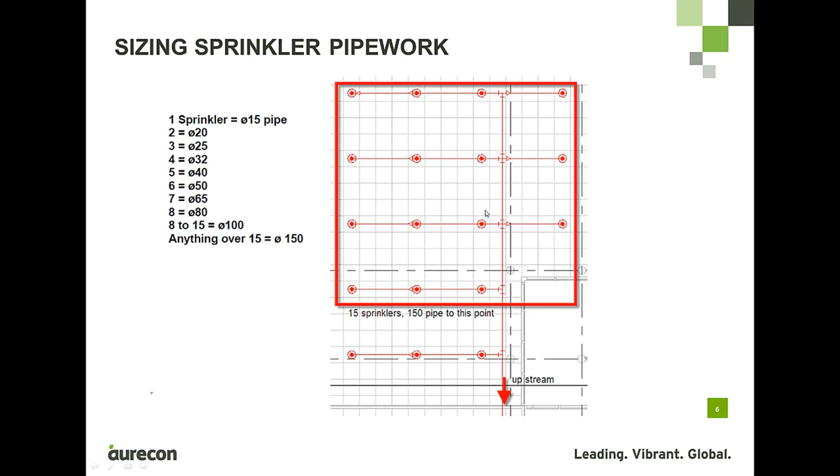If we then break it down, we've got 12 sprinkler heads here, so this pipe segment's going to need to be 100 diameter. We've then got 8 sprinkler heads here, so this segment of pipe is going to need to be 80 millimeters in diameter. And lastly, we've got 4 sprinkler heads on the end here, so this segment of piping is going to need to be 32 millimeters in diameter. And so on and so forth. You can work your way through, keep going downstream until you've sized all of the pipe work.

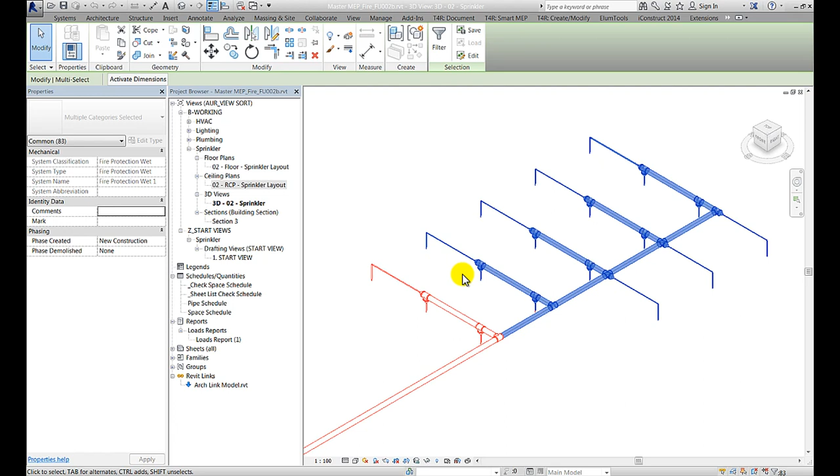So let's see now how we can apply this logic to our sprinkler pipe layout in the model. Let's expand the 3D view, and for this exercise we'll work in the 3D view exclusively. So going from our code, we know that if we're feeding anything more than 15 sprinkler heads, we need a 150 diameter pipe. If I select these sprinkler heads like so, I know that I have 4, 8, 12, 13, 14, 15 sprinkler heads here. So I'm going to need a 150 diameter pipe to this point, as I'm feeding more than 15 sprinkler heads from this point onwards, coming from the upstream pipe.

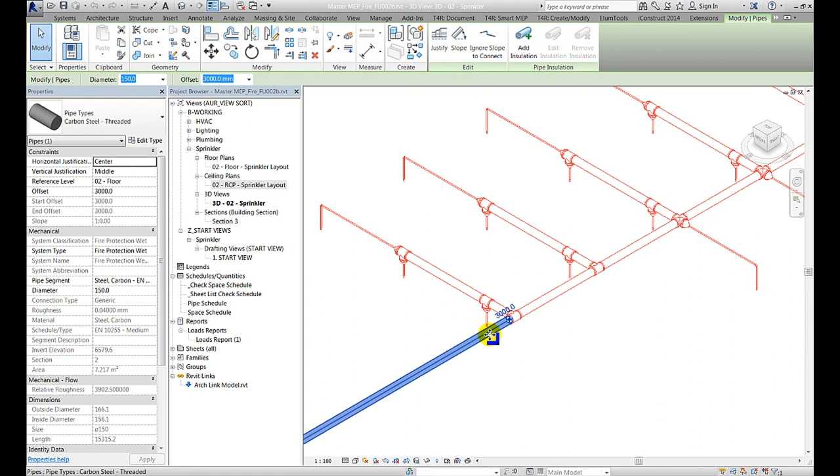So I can zoom in here. I can select my pipe work and the fittings to this point, and I can make sure that the diameter is in fact 150. If I move along downstream to this next segment of pipe, I can see that this segment is feeding 4, 8, 12 sprinkler heads in total. So I know that this segment of pipe, along with this fitting, needs to be 100 mm in diameter. So I can come up to the options bar here and change it to 100. And the pipe will change in diameter.

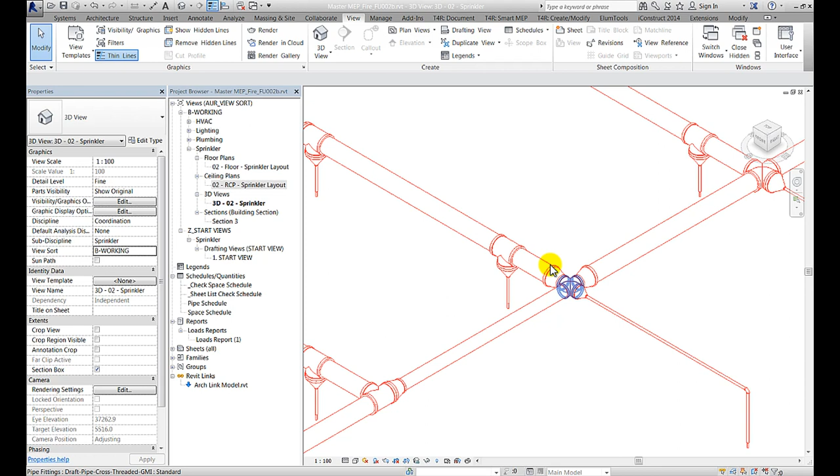And notice while I am manually changing the diameter of these pipes, Revit is automatically resizing and adjusting the layout so that everything stays connected. So it's somewhat automatic as I am manually changing these sizes. Let's keep moving downstream. If we come to the next segment of pipe here, we can see that it is feeding 8 sprinklers in total. So we know that this is going to have to be 80 diameter. I can select it along with the cross fitting, and from the options bar I can change it to 80. And the pipe will resize accordingly.

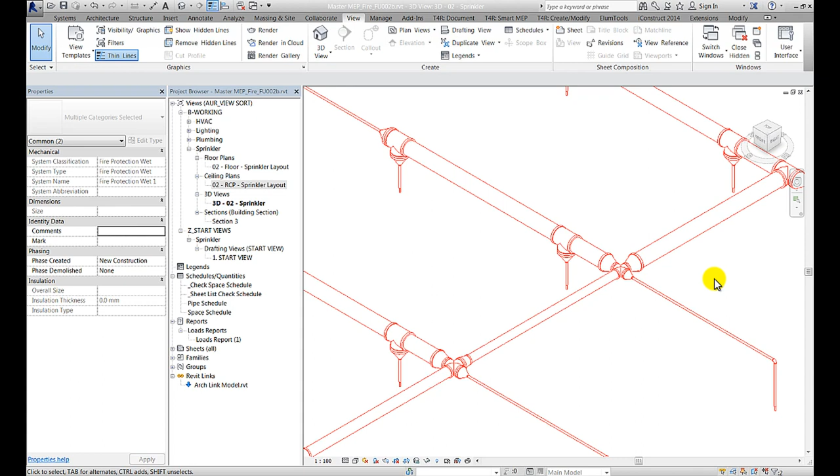And lastly, come up to the last section of main pipe run here. This segment is feeding 4 sprinkler heads, so this pipe is going to need to be 32. So I can select it once again and the fitting, and come up to my options bar and change that diameter to 32. We can now see that we have effectively resized the main pipe run going to the last T section here.

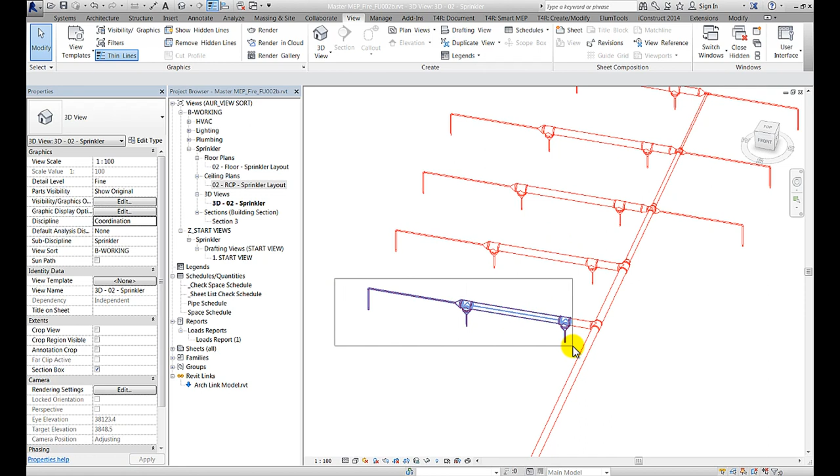Let's now have a look at the branches. If we have a look at the branches on the left here, we can see that each of these branches is feeding 3, then 2, then 1 sprinkler head. So going by our code, we know that these pipes are going to need to be 25, 20, and 15 respectively. So I can select my pipe and the T-fitting to this point on this branch, and I can come up to the options bar and change this to 25. You'll see the pipe diameter change accordingly and the transitions will be put in.

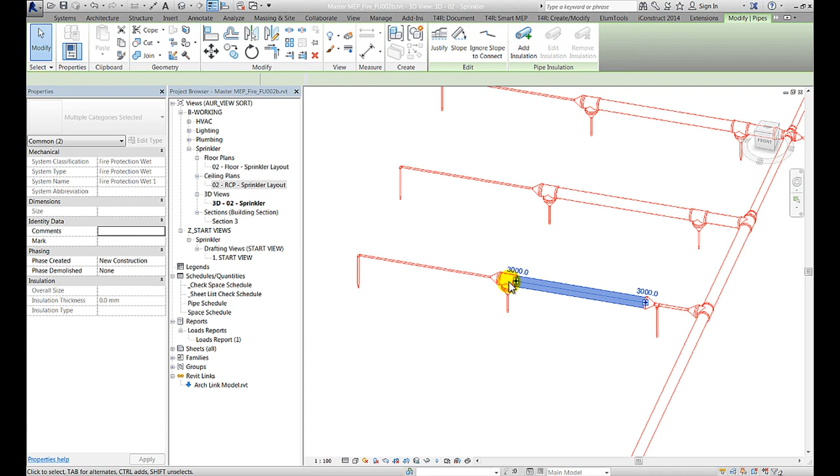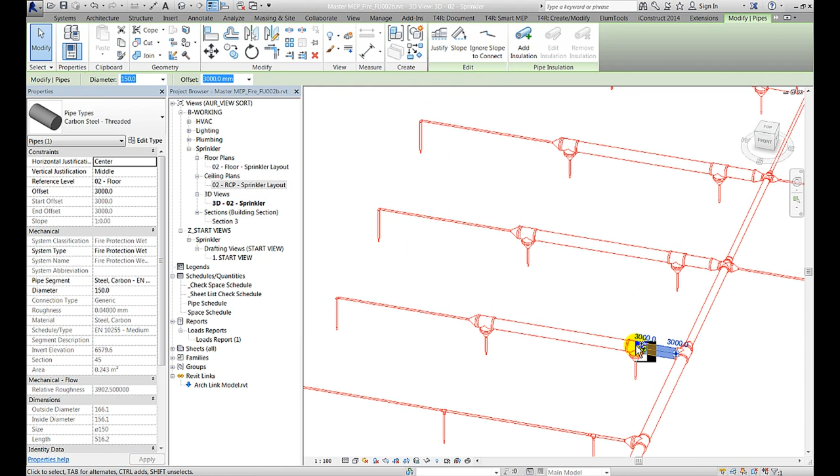Let's get this next piece and the T-fitting, and because this is feeding 2 sprinklers, we know this needs to be 20, so we'll come up to the options bar and change that to 20. And then we can see that this pipe here was already 15, so there's a transition piece already in there, and it's 15 right down to the sprinkler head, so that's fine. So let's work our way through and change all of these, and I can do them all at the same time for the same sizes. I can hold my control key down and select all the pieces in one go. I can now change all of these to 25.

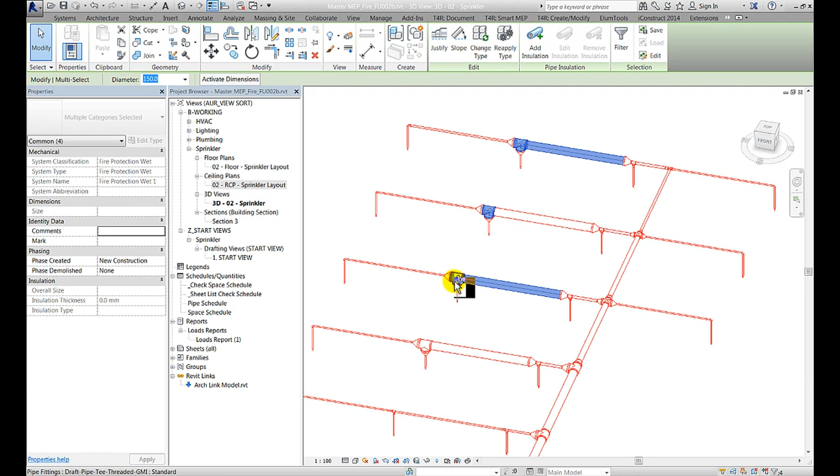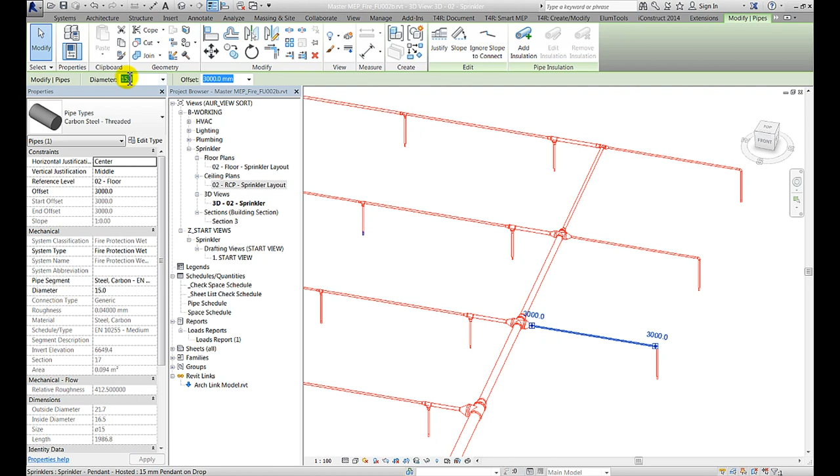I can then select the next segment of these branches and the T's. Make sure I've got them all selected, and I can change this diameter to 20, and all of the rest should be fine at 15. All that's left is these 3 branches on the right. We know that each of these is serving only 1 sprinkler, so they need to be 15. And if we interrogate one of these pipes, we can see that they are already set to 15. So these are okay as they are.

So this is an effective way that fire protection designers can resize pipe work in Revit. Although it is essentially a manual task, as I mentioned, the fact that Revit will adjust and alter the entire network as you work makes the process somewhat automated.